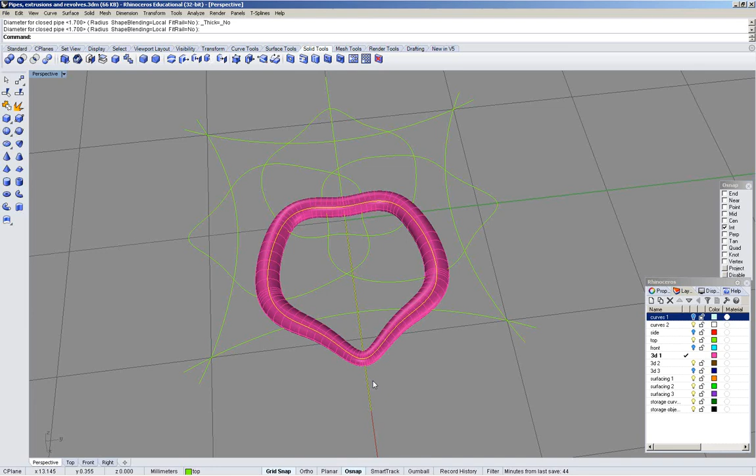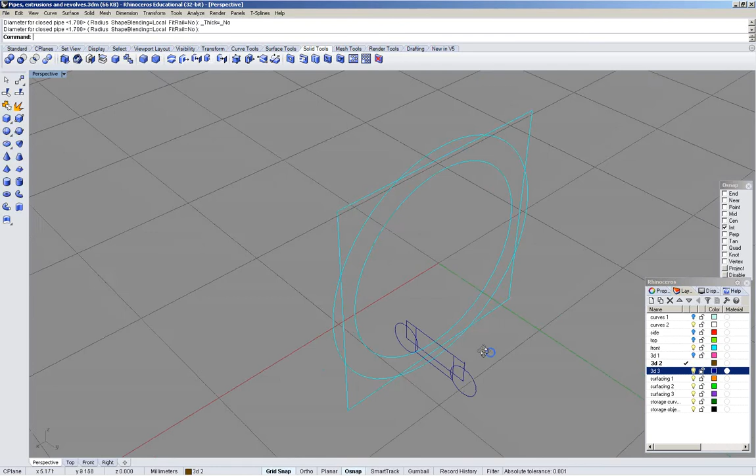Following up on our last tutorial, this tutorial will be dealing with using simple extrusions and revolves for designing rings. Let's start with extrusions.

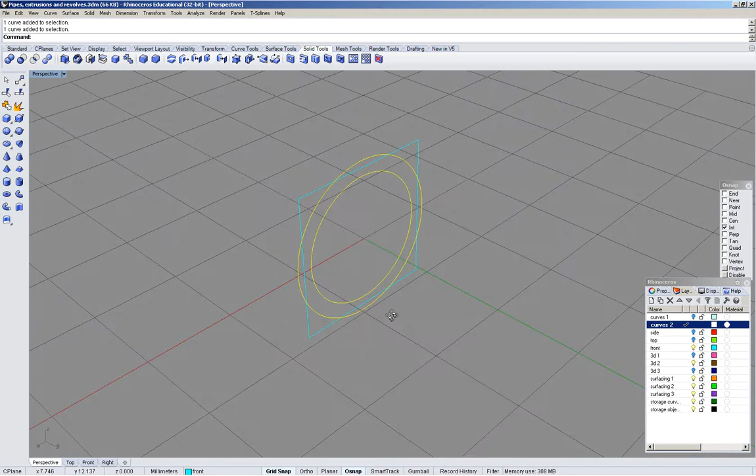Using these two basic curves, if it's a planar curve, which this is, especially if it's two closed planar curves, Rhino will be able to figure out which way to extrude. However, normally Rhino needs to extrude perpendicular to the current C-plane.

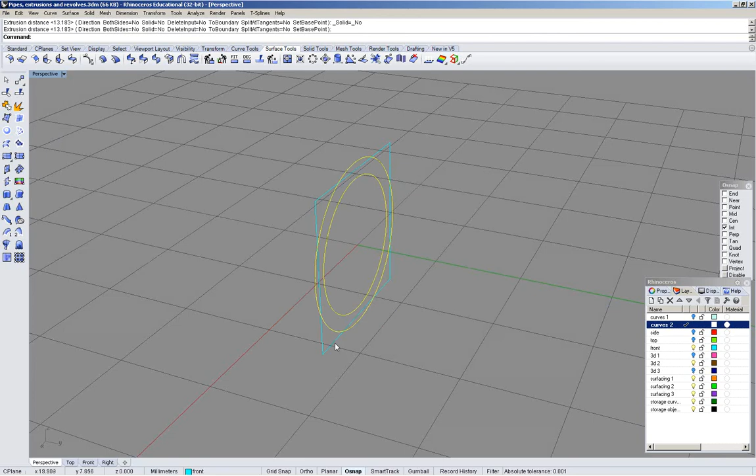So normally if I tried to extrude right now, it would extrude straight up and down. An example would be if I explode this and I have a simple straight line. If I try and extrude that and I want it to come the same direction I just extruded these, it's not going to work. It's going to extrude it perpendicular to the C-plane. That's Rhino's normal habit.

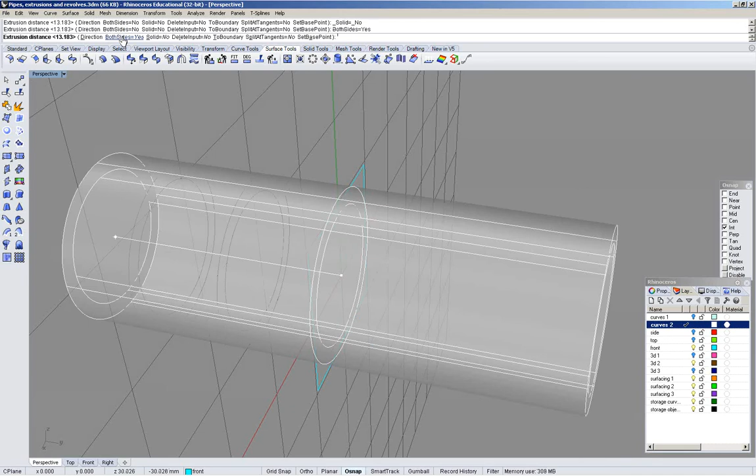So it's a worthwhile thing that whenever you're going to do an extrusion, to consider what C-plane you want it perpendicular to. In this case, it would be the front. I want it to go both sides, and I want it to be solid, so it builds caps on the end. And I want it to have history attached.

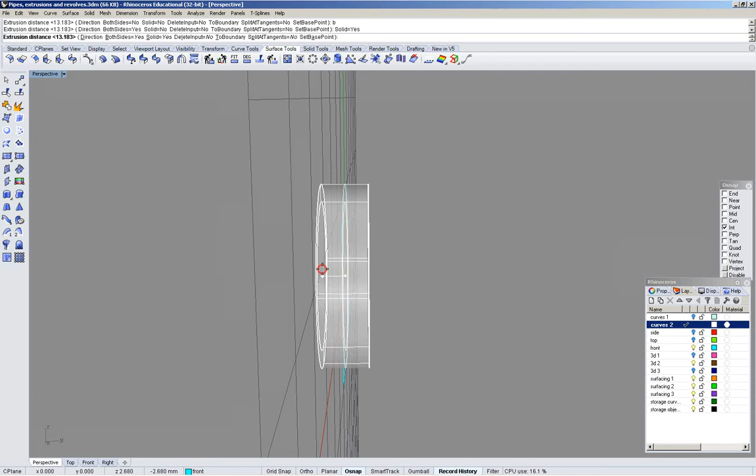And make a ring as wide as you think you might want it, the widest you think you might want it. Having history attached, we can now go in and we can play with these curves.

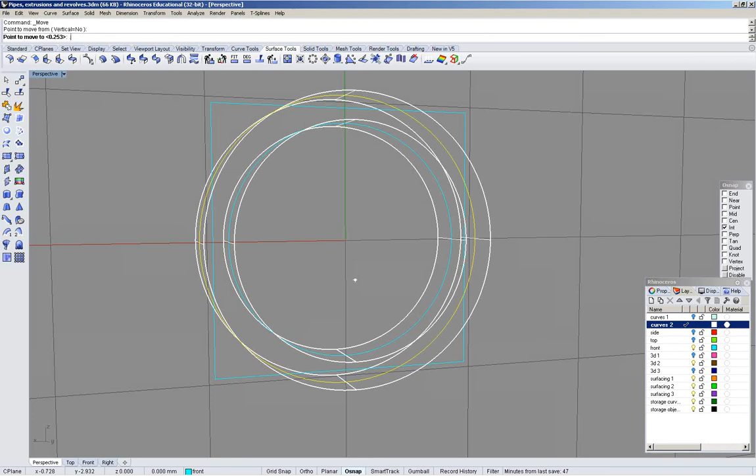If I wanted more of a tapered bottom, for example, I could move this up 4/10 of a millimeter, and the extrusion will follow if I want more of a dome ring involved. I can rebuild this.

Now let's say 12/4. Turn on my points. We have the same thing as before. We have an orientation of points that I'm not really thrilled with.

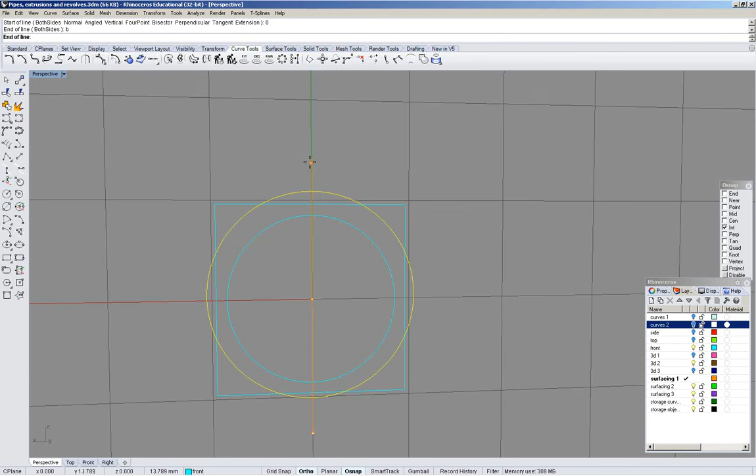So I'm going to create that same, as I've shown you before, a straight line as reference geometry from the center, both sides, pulling straight up with ortho, with Shift key. I am going to adjust my curve seam. Just make sure it's where I want it. It is.

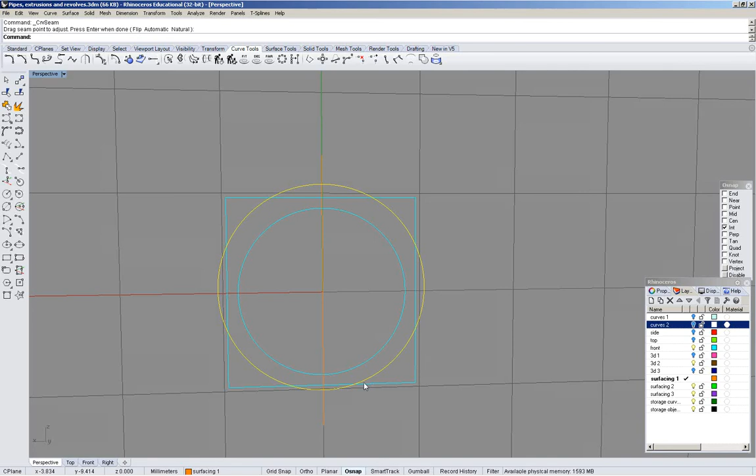I'm going to rebuild this in a number that I think will give me what I want. Let's say an odd number, let's say 13. Turn on my points and see if I've got my point at the top. I do. So by using either an odd or even number, by rotating the curve, rebuilding it, changing the curve seam, there are several ways, but if you're going to do curve point editing, it's important that the landscape created by your points gives you what you want.

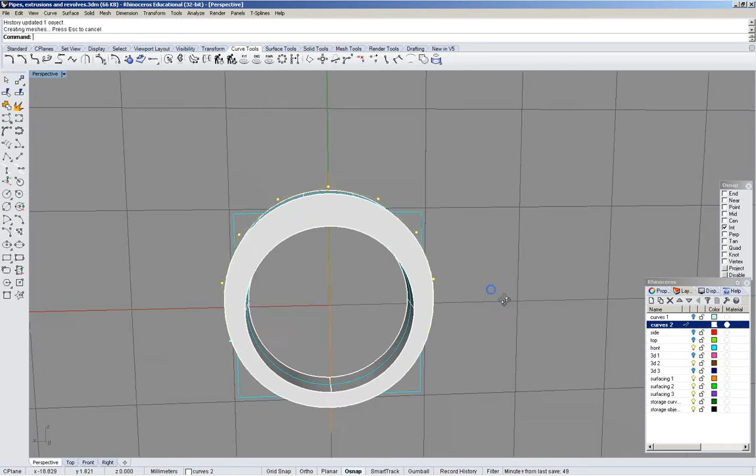So I would like to have this be taller from the midpoint up, and you will see that my extrusion is matching.

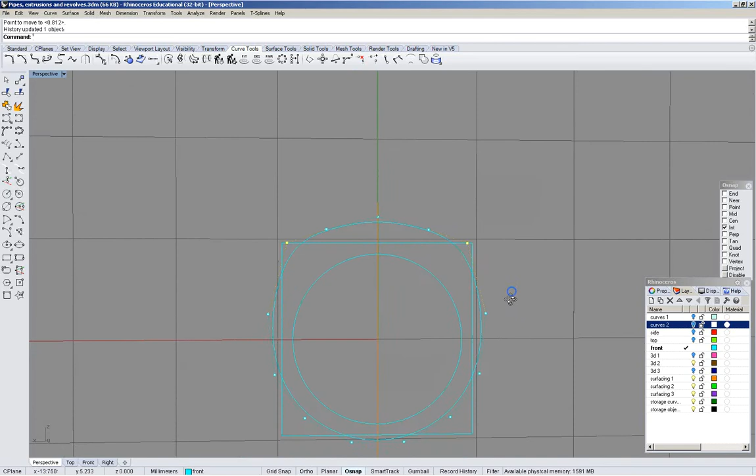Maybe I would like to have more of a broad top, a little more elevation still, and maybe a little broader still. So I'll do a non-uniform scale. You play with yours however you like. The homework just requires that you show me that you've played, experiment it around. That is the point.

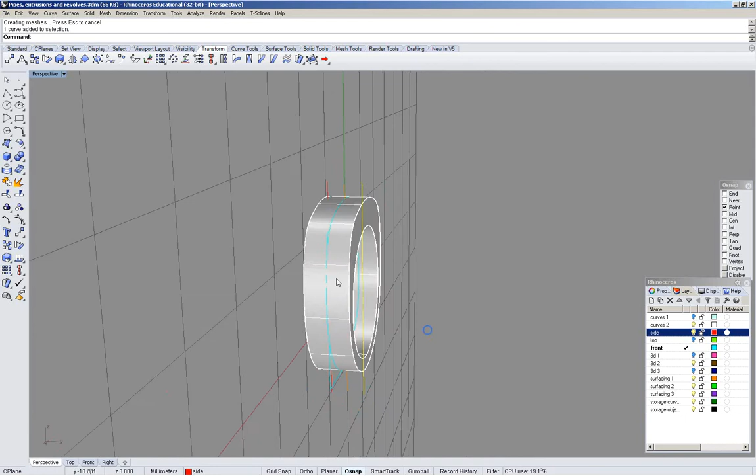Say we want to make a taper for this. So we would extrude this curve to the side. Well, as I pointed out before, Rhino always extrudes perpendicular or normal - yes, another word in 3D modeling - normal to the, that means perpendicular, straight outward from, normal to the current C-plane. So if I hit extrude, it's going to want to do it that way.

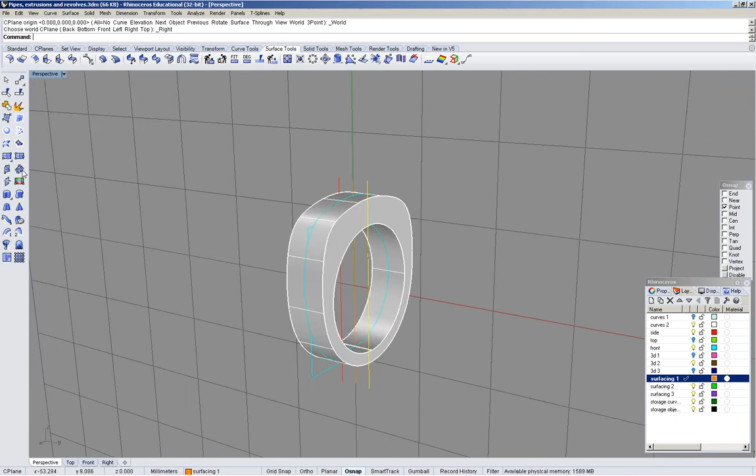I don't want it that way. I want it coming across the front of the ring, so I need a right C-plane. Going to extrude that straight out. Check the direction, because I'm going to want to use this to cut the stone, the ring. So I want those points pointing towards the ring. Flip, enter.

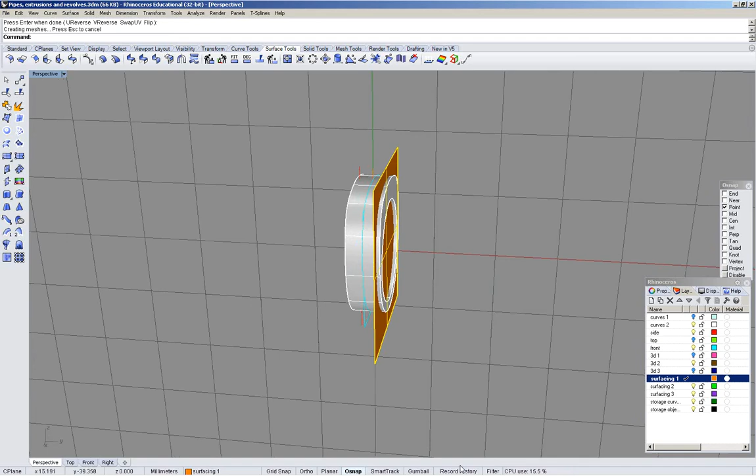Okay, going to record history and mirror it across the middle. Having done that, you know what, let's backtrack a little bit. I'm going to record history before I extrude. The other way would work fine, but this gives us a little easier control.

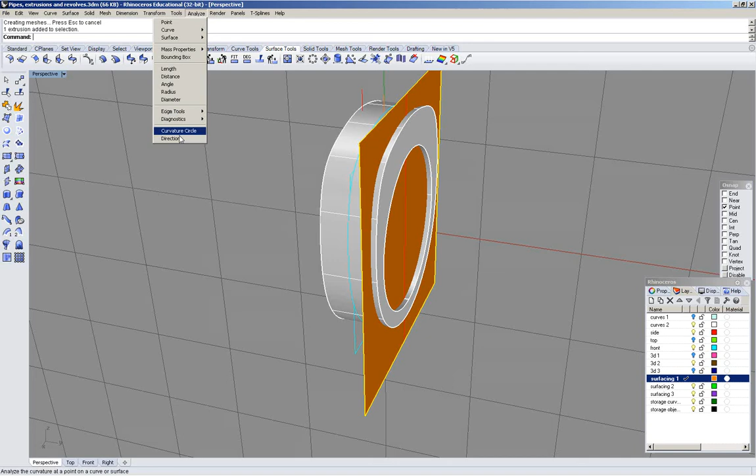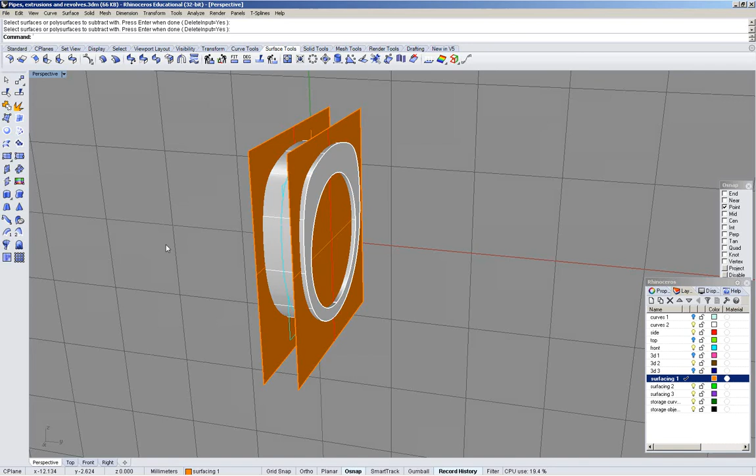Analyze direction. Record history. Record history, solid, difference. So I selected what I began by, I had it pre-selected and I'm going too fast. Let me slow down. Record history, Boolean difference, select what you want to subtract from, enter. Surfaces you want to subtract with, enter.

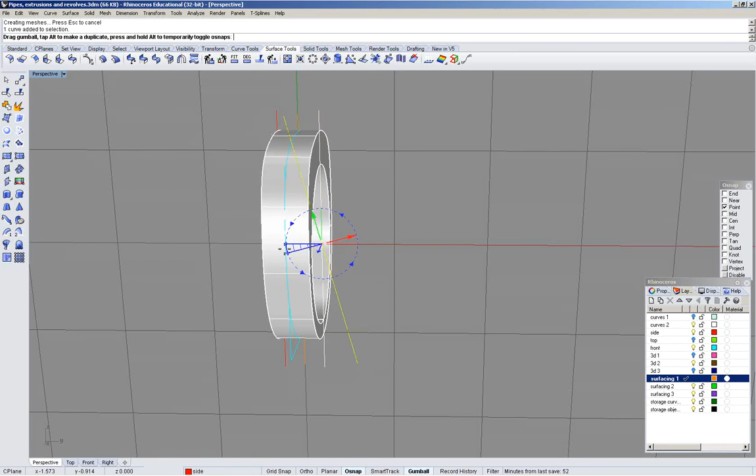Now, if I take a hold of this rotation arm, and see, unfortunately, history isn't updating. I'm having a lot of challenges with unpredictable history. The reason history didn't work is because I flipped the direction of the surface, and the surface that I flipped was a child. It broke history with the parent curve.

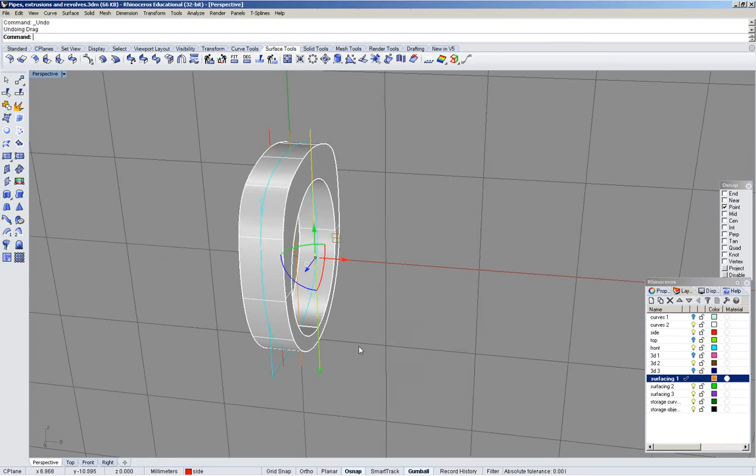That gets to be very tedious. So, that being said, I will record history and mirror.

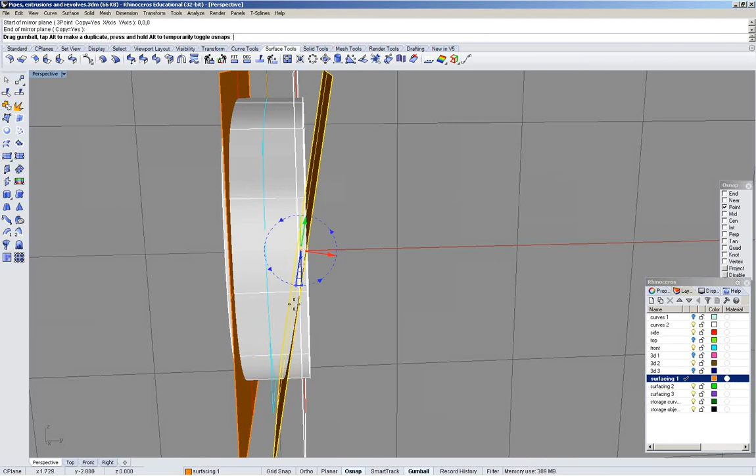And now I won't be able to - now see, there's that jump it does. It does that every time I use Gumball on my machine. It may not on yours. But if it does, you can also rotate just using a transform rotate command. And you can click in the middle, you can click at midpoint down the edge of the surface, you can click at the top corner of the surface. Just somewhere predictable.

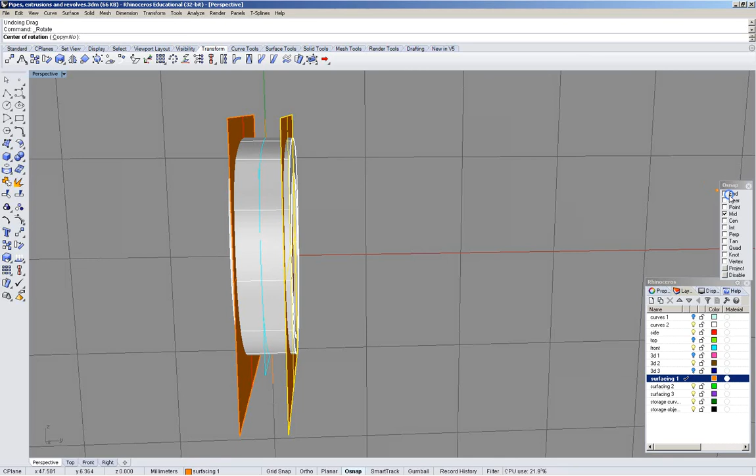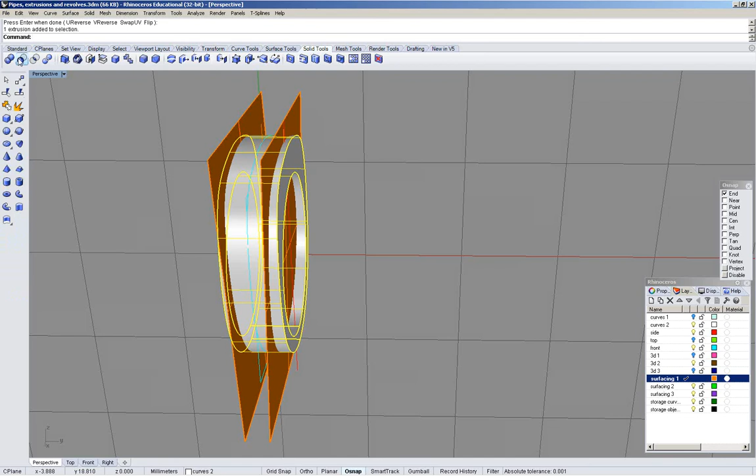Until you see a taper that you like. Check your direction. Yeah, everything's fine. Solid difference. We'll do it off tab this time.

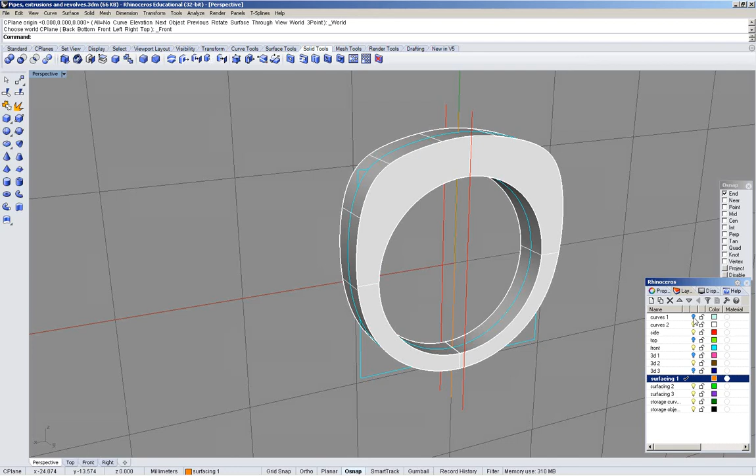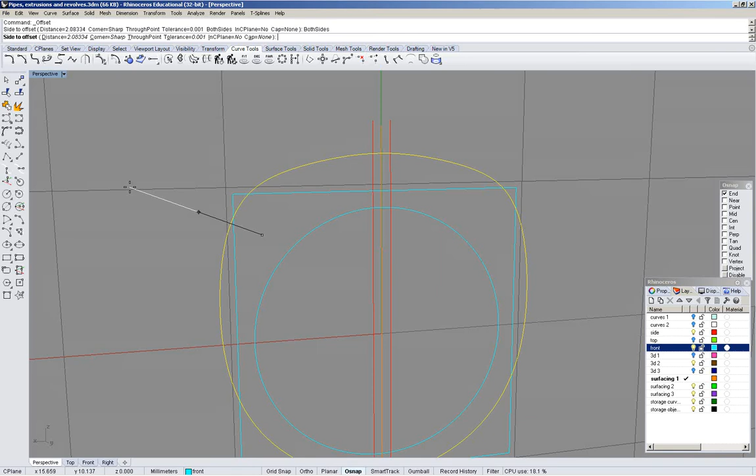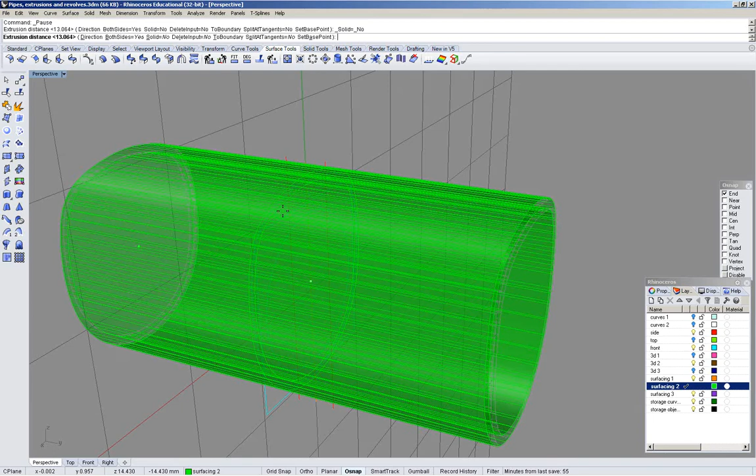So, I've done that. Now let's say I want to put a strip of stones around the outside of that ring. So I'm going to offset this curve, the outer shoulder, both sides, go ahead and extrude that. Once again, both sides, solid equals no. And I don't care how far out it goes.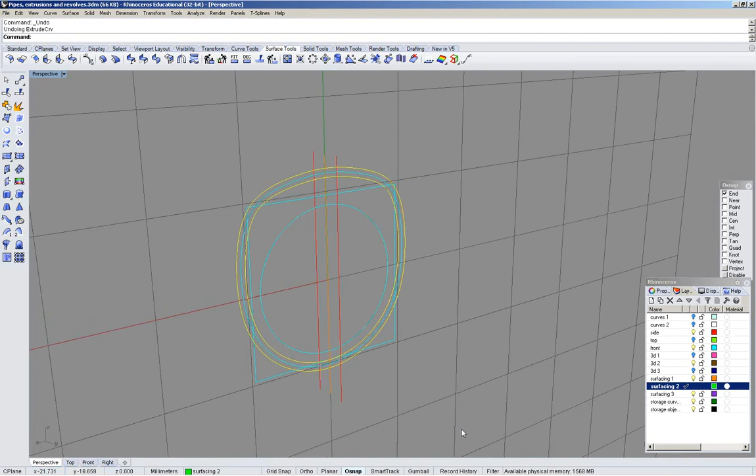Got a record history though. Bad day for me doing recording history. Alright, there we go.

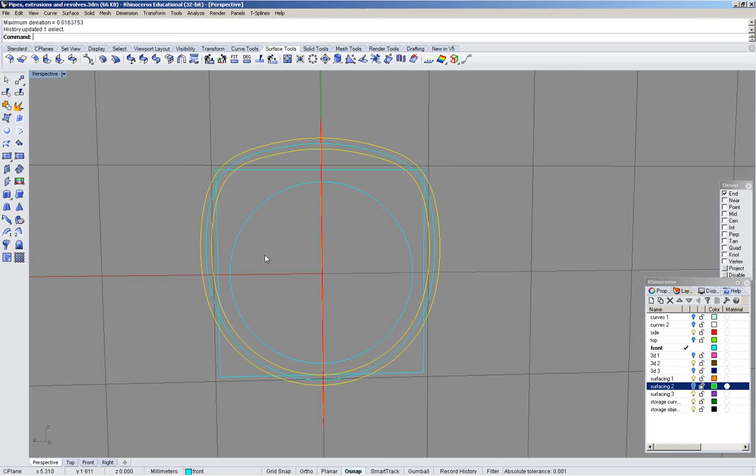So now, check the curve seam. Good, it's in a predictable place. Rebuild these curves. 24 seems to keep them pretty much the same. Check the point locations, I like that. And if you look at your geometry, it's updated, it's fine.

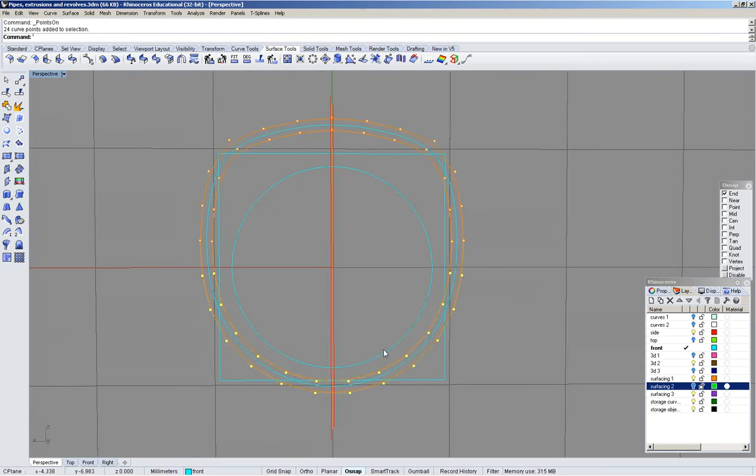What I want to do is turn on these points. I'm going to grab this series of points and scale them to 0, enter. What I'm looking for as I do this is for this to taper and tuck, blend into the side of the ring, to bite in, because I want this rim of stones to tuck away into the side of the ring.

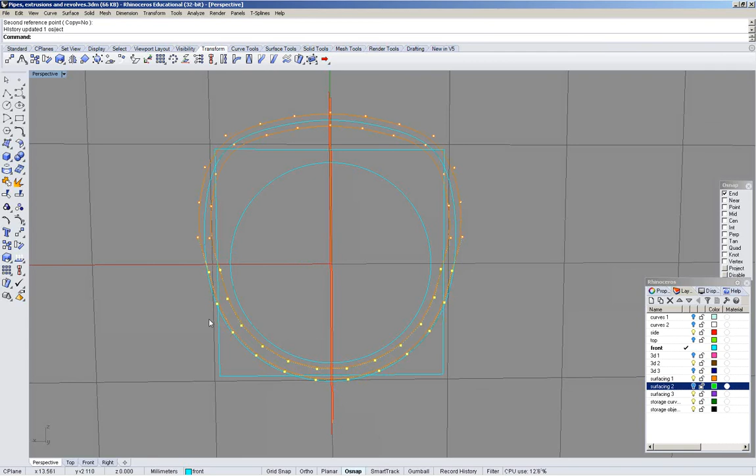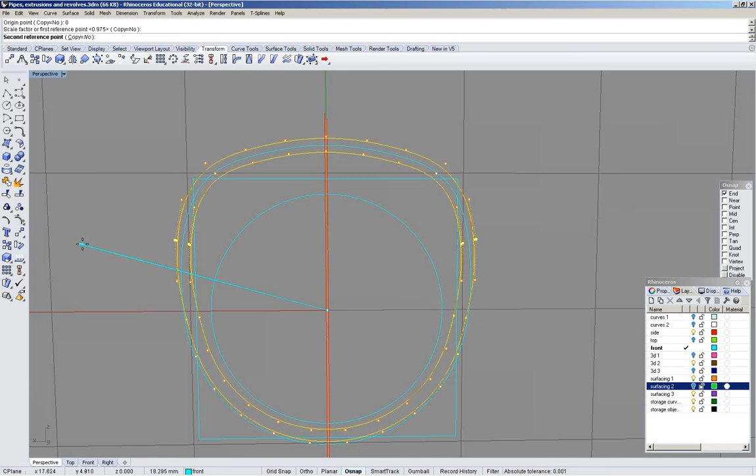So as I'm watching, it's all tucked in until about right here. If I wanted a little more, I could do the same command, and grab these, do the same command, 0, enter for the starting point, until I have a transition that I like. And you see that our model has updated.

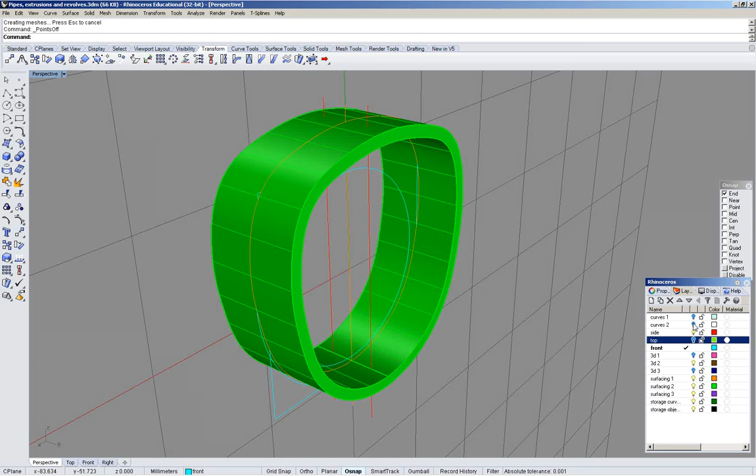Okay, turn off my points. If I bring back my original shank, you can see we have a little problem. I want this to be inset from the edge of my ring. Well, that's kind of a problem for me, because it's too big. What we're going to do is we're going to extract this surface.

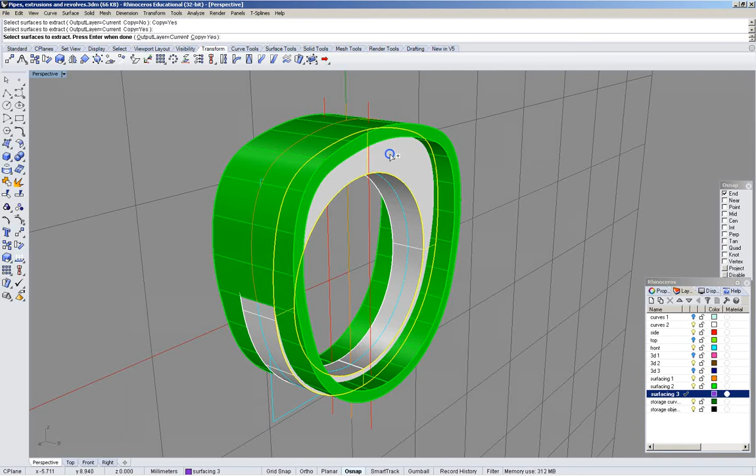We're going to go to Solid, Extract Surface. We want it to go to the current layer. The in choice is Input or Current, we want Current, and we want Copy to equal Yes. Click on that surface and hit Enter, and we have borrowed a copy of that surface. We're going to untrim that surface. I'm going to hit Untrim All. Okay.

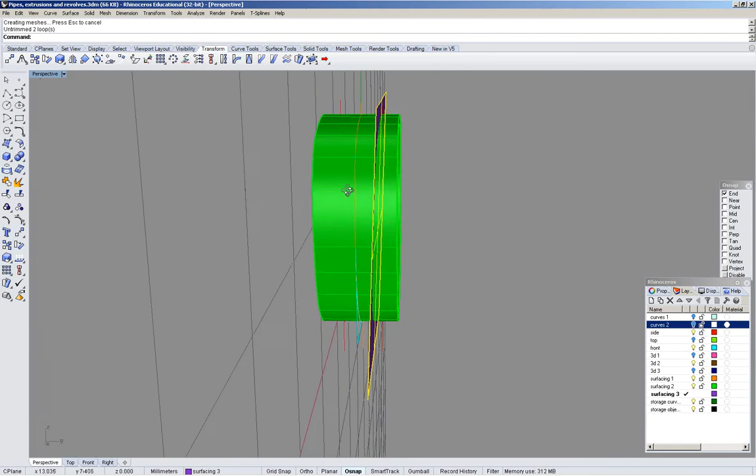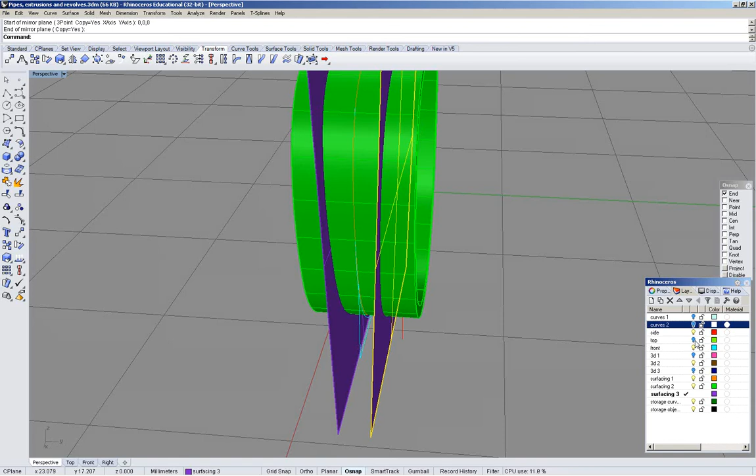What I want to do, but there are two ways I can do this, let's do the simple way. I'm going to record history, mirror it over, then I'm going to move it in. I turned off our insert color and brought back our main ring shank. Move it in a little bit at a time until I get about the distance from the edge that I want. Remembering that this strip is going to kind of fold away.

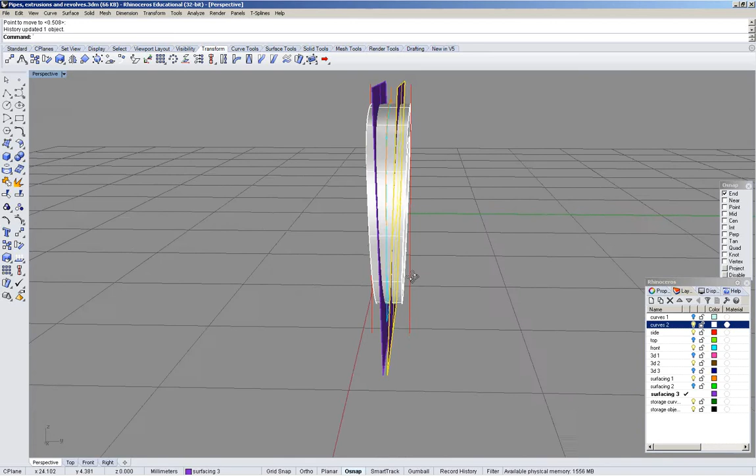I'm going to analyze the direction. It's pointing the wrong way. Flip it. See if it fixed that one as well. It did.

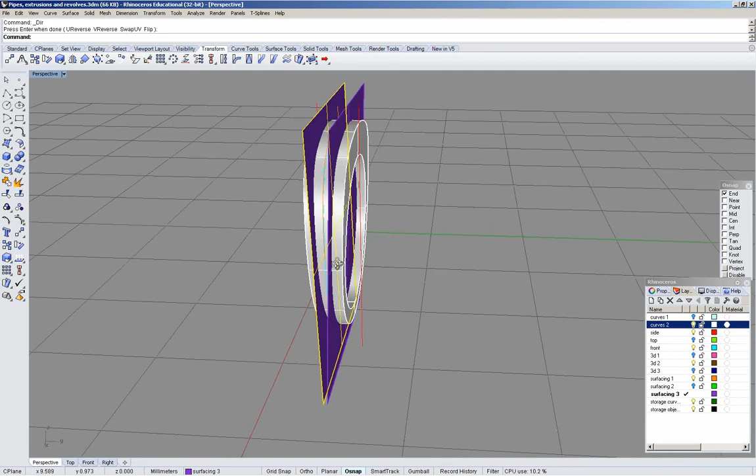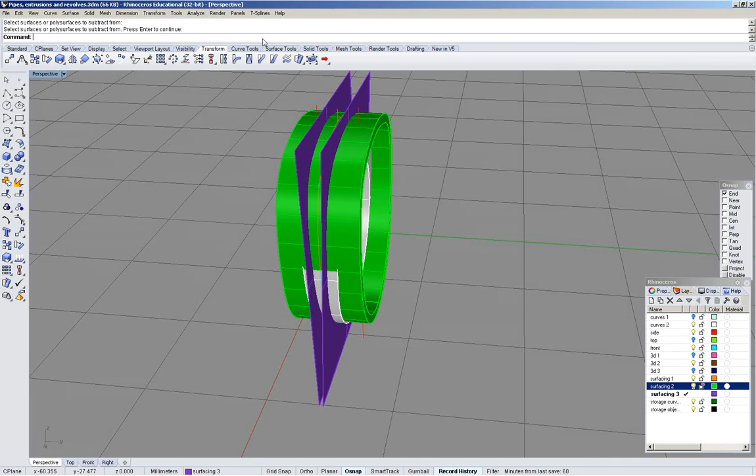To see if we can get the Boolean difference to work with our history. So record history, solid difference. Record history, Boolean difference. Select what you want to subtract from, the large insert. Select what you want to subtract with. Okay.

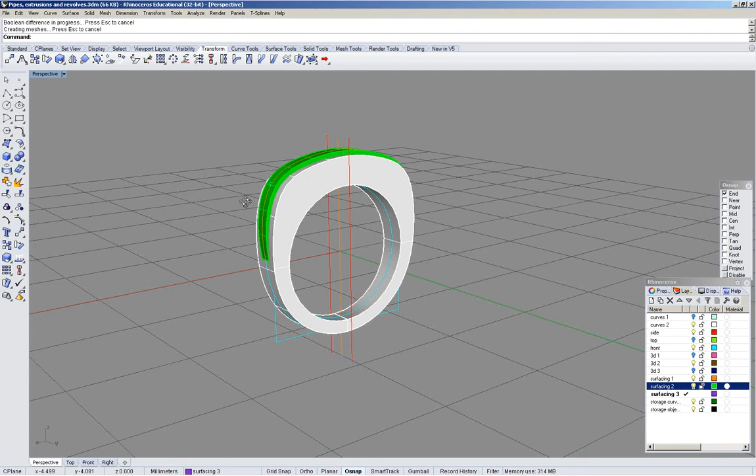And there's really no way to access it, so we'll just call that good. And you can see that that strip of stones is offset now predictably from the edge and rises up in a nice way from the shank of the ring.

Last thing we could do with this is we could fillet the edge of this to make it nice. Filleting an edge of a solid or two surfaces, you need to have a corner where two surfaces meet. Works best with solids, but it'll also work well with a poly surface that has a good clean corner.

Going to do a solid fillet edge. We'd like to know how far this distance is. There's no convenient way to measure that, so we'll do it by eye. Right now it's at 1, that's the default. Okay, that ends up being a little bit too much.

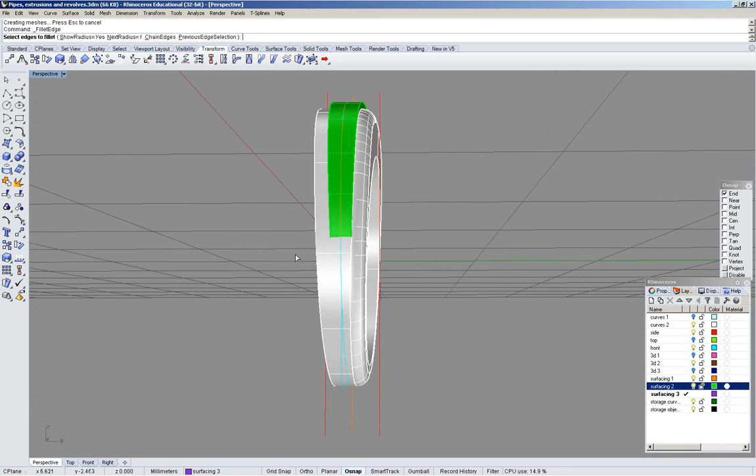Can I go ahead and do the other side? See how much space we had at the bottom? Okay, it looks like at the bottom I could go a little bigger, and at the top I need less. So I'm going to do a variable fillet.

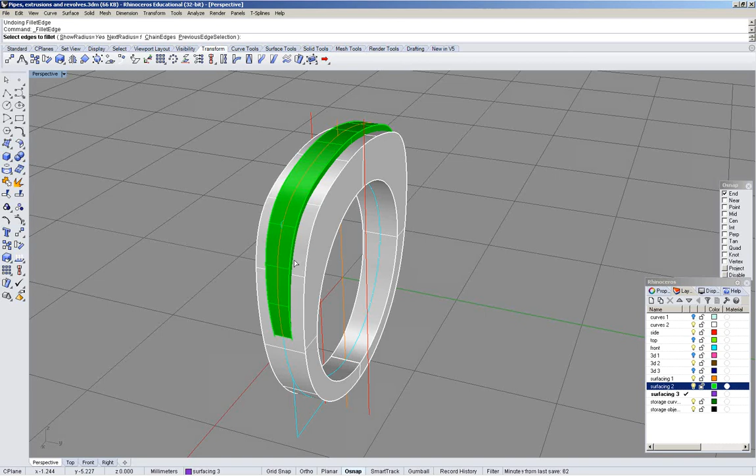So I undid twice to remove the fillets I did. I'm going to fillet this edge. Now the thing with fillets is you have to select the spacing before you actually click on the edge, so I have to begin that again. Before I select anything, I'm going to type in 1.25. Let's make it 1.3.

So now when I select what I want, it'll be 1.3, press enter when done. Select handle you want to adjust. You can actually grab this handle now and adjust it manually. What we want to do is add a handle. We're going to add a handle right up here at the top. We're going to hope that we have a quadrant we can grab. Yes, we do.

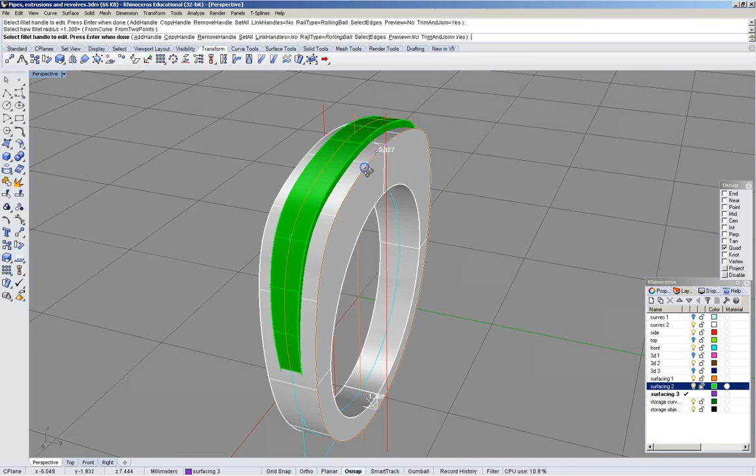And we're pretty much done there. We'll hit enter, and now it says press a handle to edit. We can grab this and we can do it visually, just until we see that that fillet does not reach in and touch our strip of stones. Or we could have typed in a dimension, either one works. Hit enter.

And you can see we get a nice variable fillet. It's crowding here a little bit, but we're going to be blending, so that's fine. Difficulty is that since it's not a numeric entry, how am I going to get consistency on the other side? I can take the surface off, mirror it over, trim. That's getting very sophisticated and complicated.

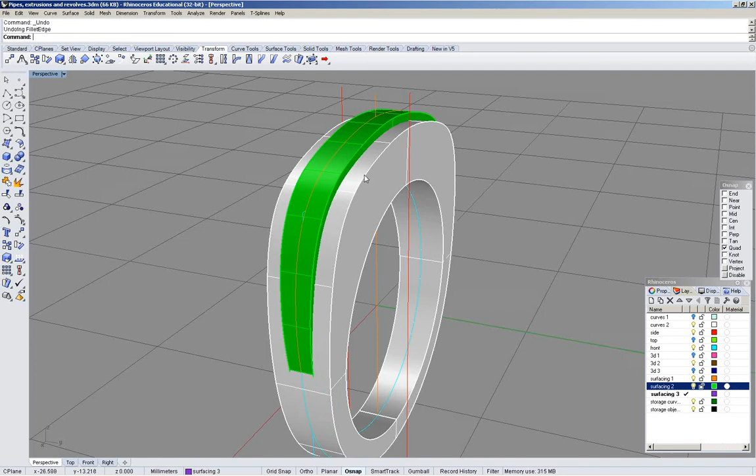So instead, I'm going to make sure I do a numeric entry. Keep it at 1.3, add a handle, select what I want, and I remember it being about 0.91. Type in 0.9. Maybe 0.85.

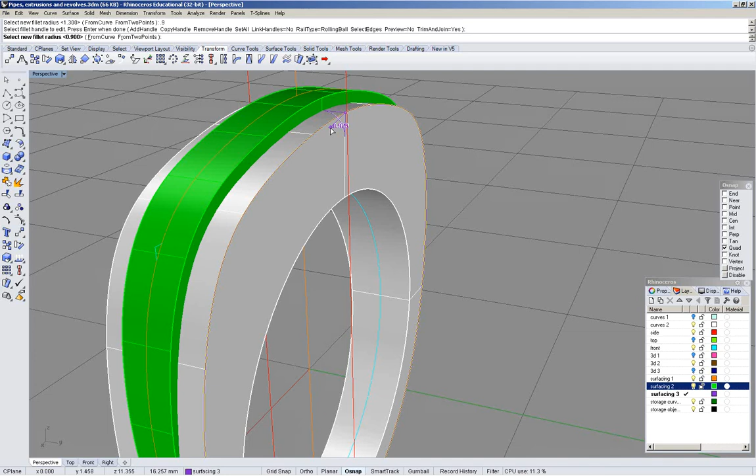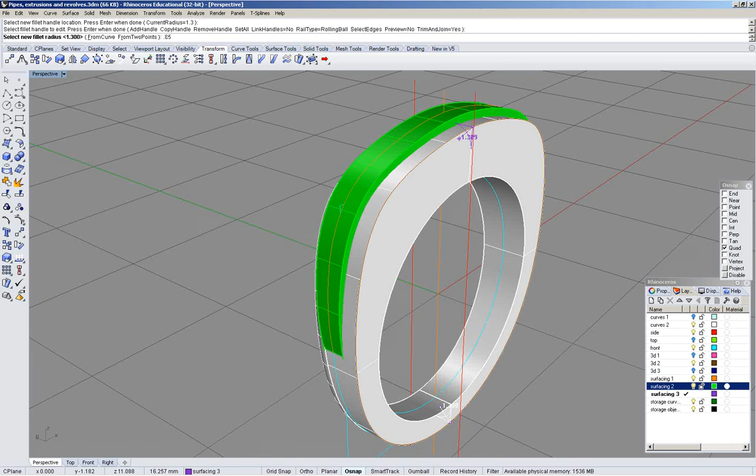See, by using a numeric entry, I can now go to the other side and duplicate it exactly. Repeat the command, select the edge, press enter when done, add a handle, up at the top, enter, select the handle you want to edit, type 0.85, hit enter, and you have a nice consistent fillet from side to side.

Okay, so play with this, do something similar, and explore how you can use extrusions and Boolean differences and extracting a surface, moving things around.